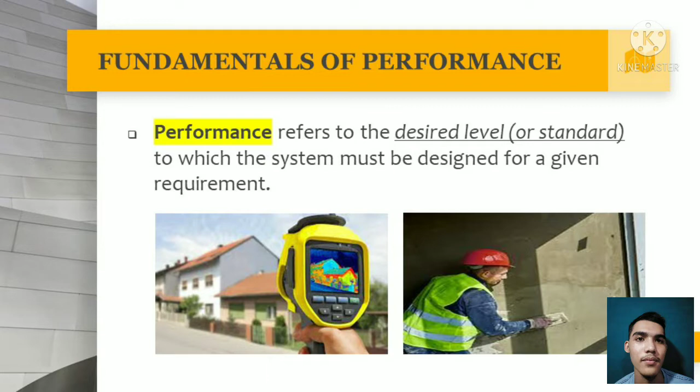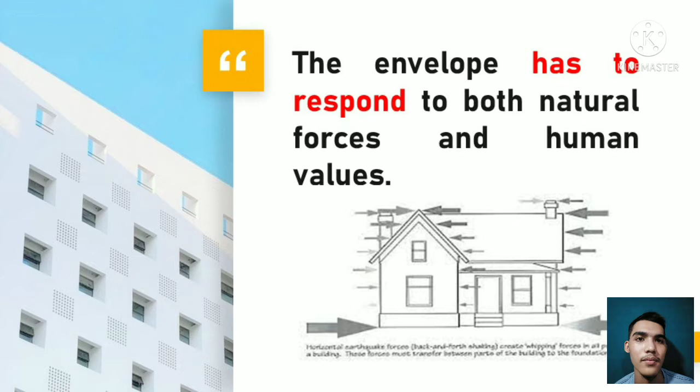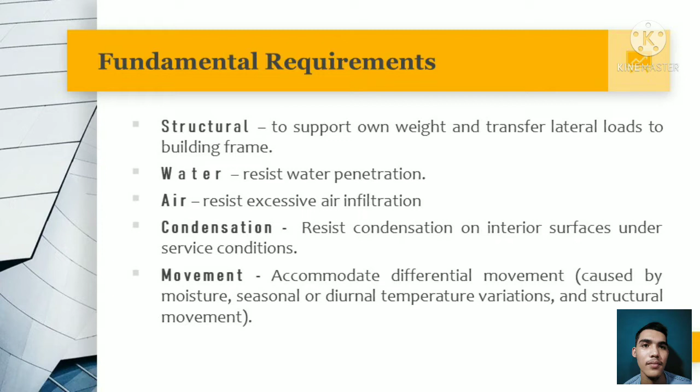Earlier, I mentioned that the system must be designed for given requirements. What are these requirements? The fundamental requirements. First on the list is the structural. If the wall is not part of the main building structure, the building envelope must support its own weight and transfer lateral loads to the building frame. Second, the water. The envelope resists water penetration. Third is the air. The envelope resists excessive air infiltration. Fourth is the condensation. They resist condensation on interior surfaces under service conditions. Fifth is the movement. They accommodate differential movement caused by moisture, seasonal or diurnal temperature variations, and structural movement.

Sixth is the energy conservation. They resist thermal transfer through radiation, convection, and conduction. Seventh, the sound. They attenuate sound transmissions. Eighth is the fire safety. They provide rated resistance to heat and smoke. Number 9 is the security. They protect occupants from outside threats. Number 10 is the maintainability. It allows access to components for maintenance, restoration, and replacement.

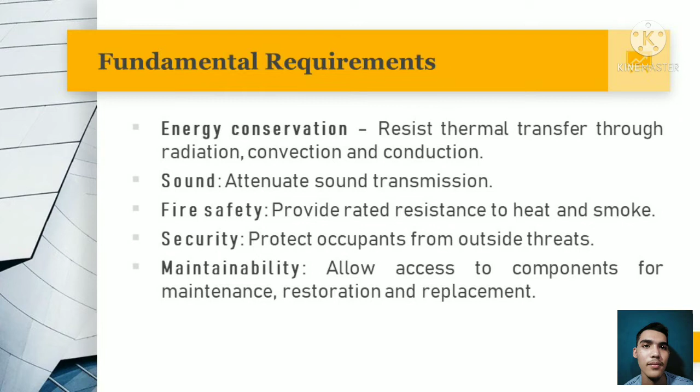11th is the constructability. It provides adequate clearances, alignment, and sequencing to allow integration of many components during construction using available components and attainable workmanship. Number 12 is the durability. It provides functional and aesthetic characteristics for a long time. Number 13 is the aesthetics. They do all of the above and look attractive. And last but not the least is the economy. They do all of the above inexpensively.

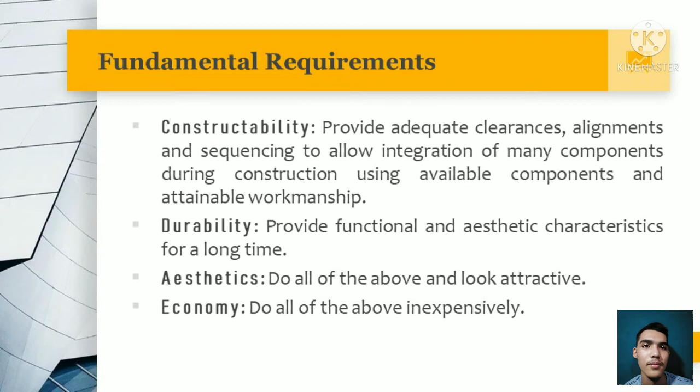Now that we already know the fundamental requirements, how can we assure that the building envelope will function accordingly? To have a properly functioning building envelope, the system needs to have these 4 key elements: support function, control function, finish function, and the distribution function. Support function. Enclosures must be capable of withstanding all the internal and external forces applied to them. The majority of these forces are structural loading. These loads include both static and dynamic loading, including but not limited to live loads, dead loads, wind loads, earthquake loads, and possible blast loads. These loads have to be properly supported, resisted, and transferred. It is to ensure strength and rigidity, providing structural support against external and internal forces and loads.

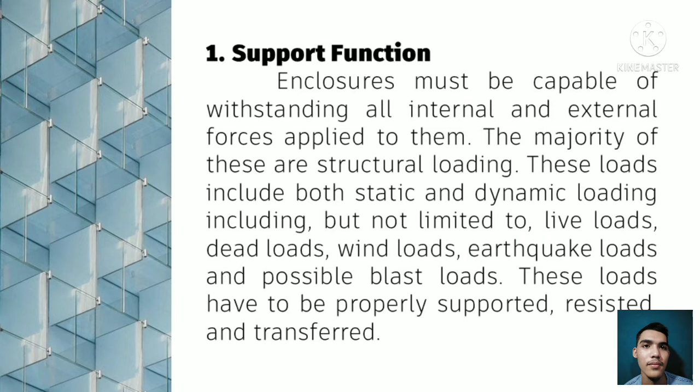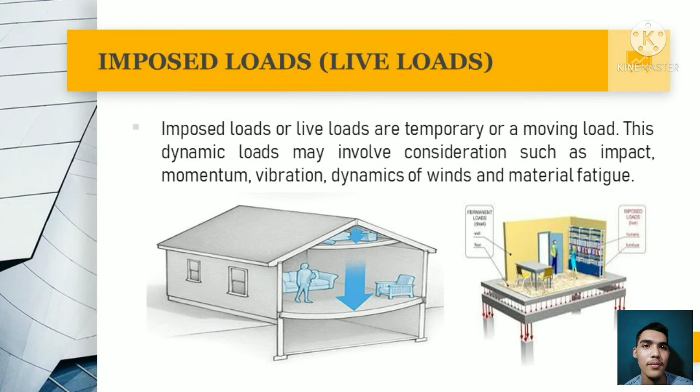Imposed load, or most commonly known as live loads, are temporary or moving loads. These dynamic loads may involve considerations such as impact, momentum, vibration, dynamics of winds, and material fatigue. Dead loads. Dead loads are relatively constant over time, including the weight of the structure itself and immovable fixtures such as walls, roof, plasterboard, or carpet. Dead loads are also known as permanent or static loads. Building materials are not dead loads until constructed in permanent position.

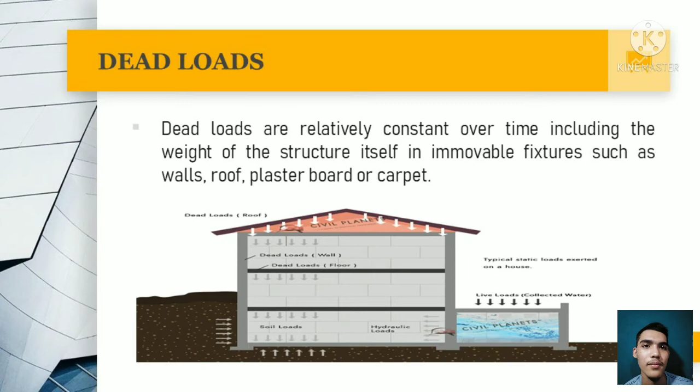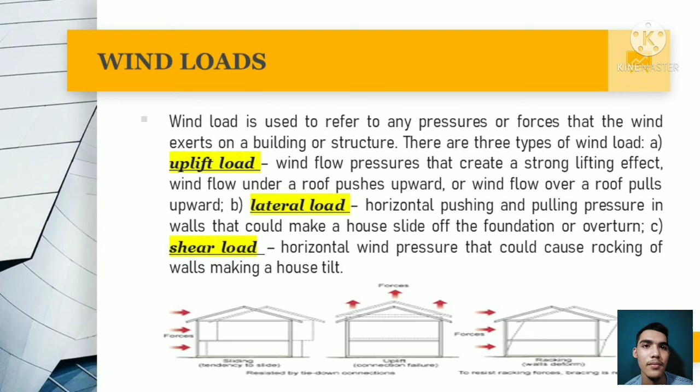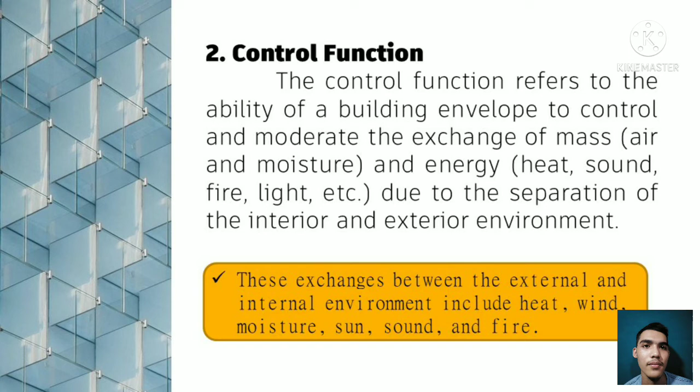the moisture, controlling moisture transfer due to rain, vapor diffusion, or condensation; the sun, controlling solar transfer from penetration or dealing with insufficient natural lighting; sound, or controlling ambient sound, excessive sound, or sound due to vibration. Fire, controlling the spread of fire within a house from the inside or outside through the use of fire doors or windows.

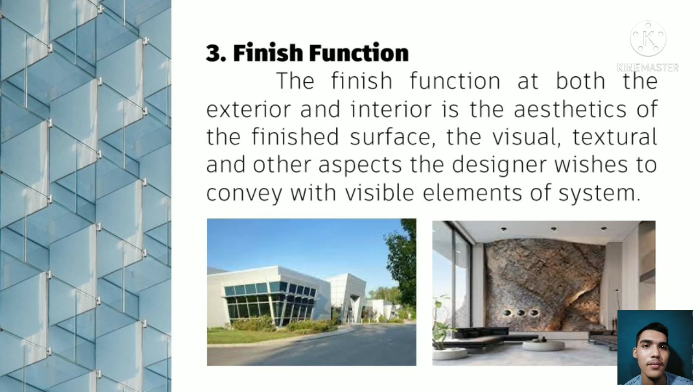The third function is the finish function. The finish function at both the exterior and the interior is the aesthetics of the finished surface, the visual, textural, and other aspects that the designer wishes to convey with the visible elements of the system. Of all the elements of an enclosure, wall systems typically have the largest consideration for finish. The last function is the distribution function. This function relates to the distribution of services through a building. This includes the distribution of power, communication, water in its various forms, gas, and conditioned air, to, from, and within the enclosure itself. Examples include HVAC, water heating, lighting, thermal envelope, and the miscellaneous electrical load system.

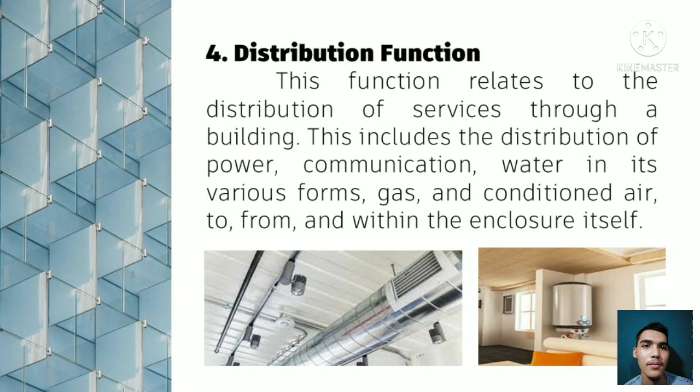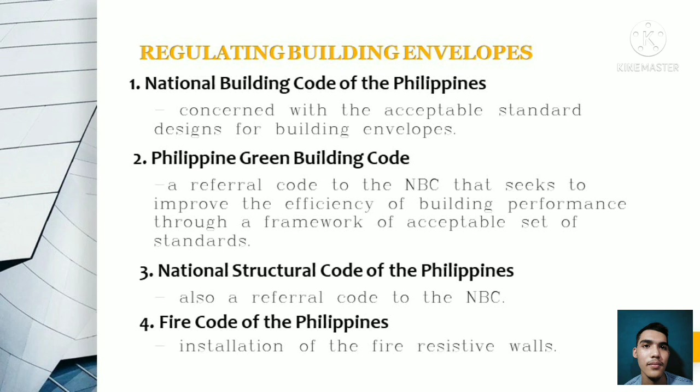Now, as we nearly come to an end, it is important to remind everyone that the building envelope is part of a structure. That means that it can be regulated in terms of its design and forms by the following codes. The National Building Code of the Philippines, concerned with the acceptable standard designs for building envelopes. The Philippine Green Building Code, a referral code to the NBC that seeks to improve the efficiency of building performance through a framework of acceptable standards. The National Structural Code of the Philippines, also a referral code to the NBC. And last is the Fire Code of the Philippines, which is for the installation of fire-resistive walls.